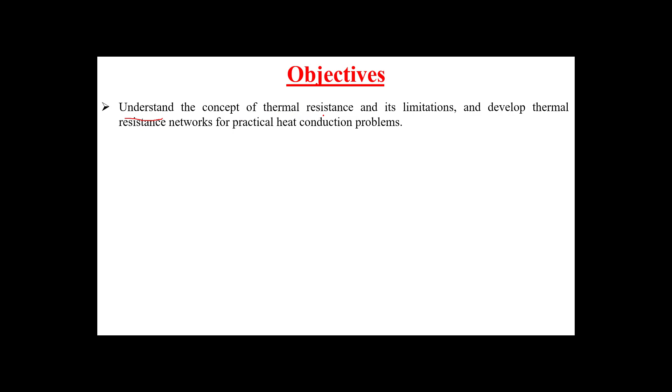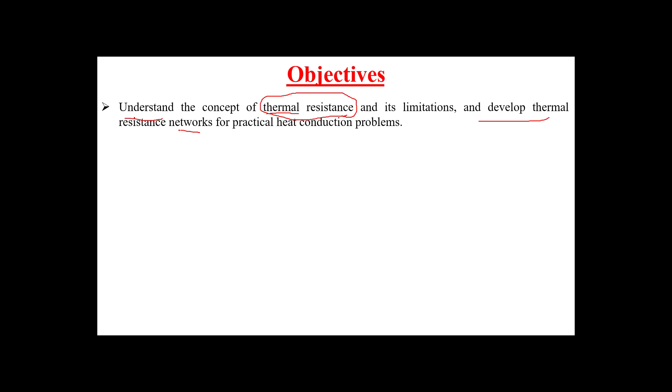Thermal resistance, I think you are very familiar with this word, resistance. We have electrical resistance, now we'll have thermal resistance. In the coming slides, we'll identify the meaning of thermal resistance and its limitations, and develop thermal resistance networks. I think you are also familiar with resistance networks, especially if I mention that these networks may be parallel resistance or series resistance or a combination of both. So yes, I think you are familiar with this.

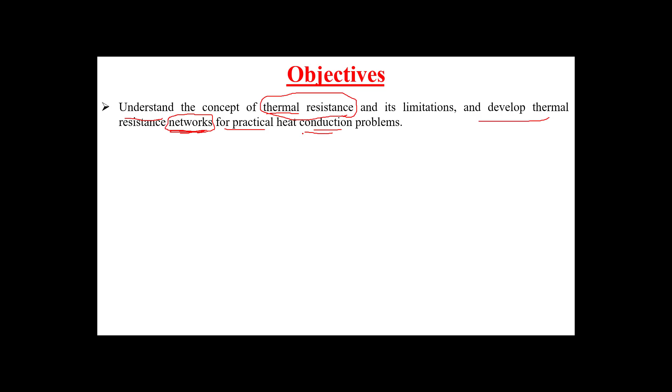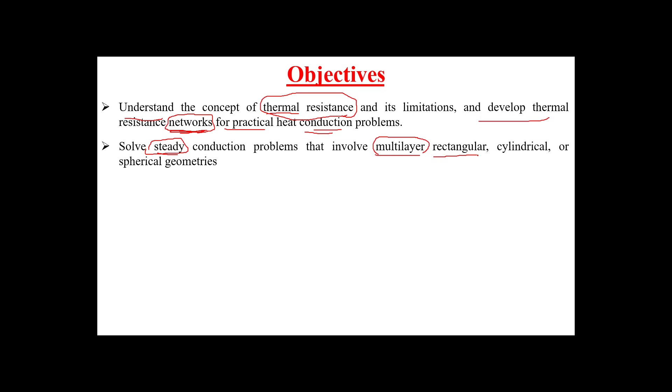But now we'll talk about thermal resistance networks for practical heat conduction problems. So we'll talk about conduction as well as convection and radiation. Solve steady conduction problems that involve multi-layer composites. It's not simple: composite, multi-layer, more than one material, for three coordinate systems: rectangular, cylindrical, and spherical geometry.

Develop an intuitive understanding of thermal contact resistance. This is the first time we are talking about this terminology, thermal contact resistance, and the circumstances under which it may be significant. We'll see when we can consider it or when we ignore it.

Identify applications in which insulation may actually increase heat transfer. So what's the purpose of using insulation? Insulation is important to minimize heat transfer; its essential use is to minimize heat transfer. So there are certain applications in which insulation may actually increase, not decrease, heat transfer. We'll see when using insulation in a bad way will result in increasing heat transfer.

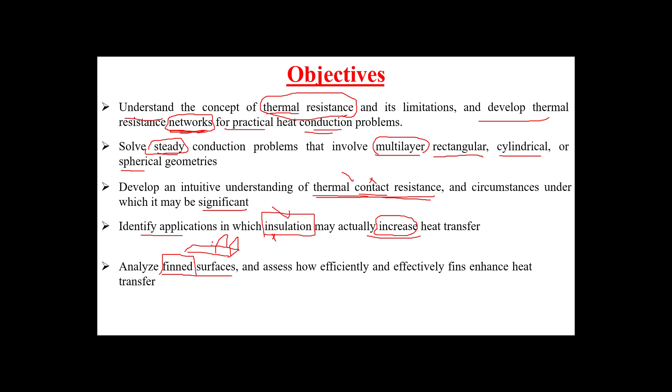Analyze finned surfaces. The meaning of finned surfaces: if we have a surface like this, with extended sheets like this, we may have welded them, or we may have fixed them with bolts, an extended surface. This is one type of fin. We call it a finned surface.

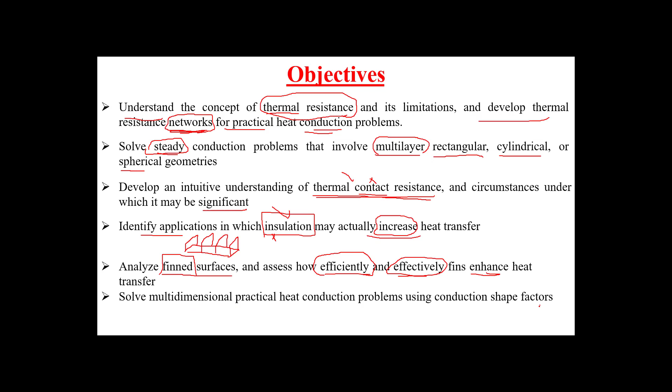And assess how efficiently and effectively fins enhance heat transfer. The purpose of adding an extended surface is to increase heat transfer, because we are increasing the surface area. So we'll learn how to calculate the efficiency and the effectiveness of fins. Solve multidimensional practical heat conduction problems using conduction shape factors. If time allows, we'll cover this objective.

Now let's start with the thermal resistance concept, starting with conduction thermal resistance. Fourier's law for conduction in the wall: K multiplied by A multiplied by T1 minus T2 over L. Remember, this is Fourier's law. We can write the conduction equation in this format if we assume what? Let me go to the writing board. Q conduction equals minus K A dT over dx.

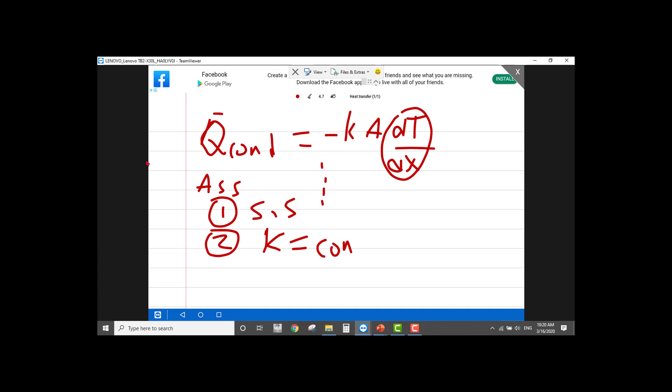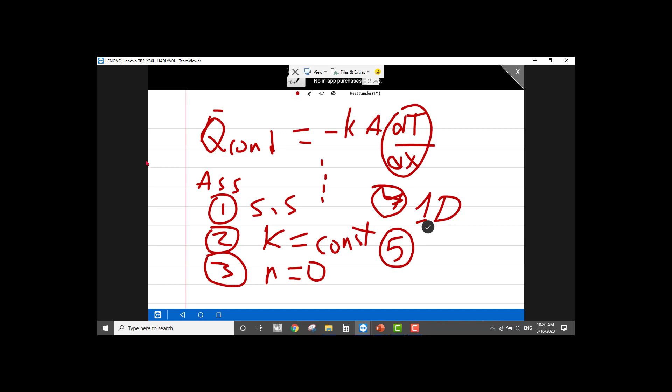We mentioned in the previous chapter that we need to go a further step to find delta T over delta x. But remember when we assume: one, steady state; two, k constant; what else? n equal to 0, this is a wall; what is the other assumption? 1D problem; and the boundary condition is specified temperature.

Q conduction equal to minus K A T2 minus T1 over L, and this bracket gives a minus sign, so minus with minus becomes positive. Okay, so here is the new equation. So Q conduction equal K cross-sectional area over L, T1 minus T2. Now this term we'll give a new name.

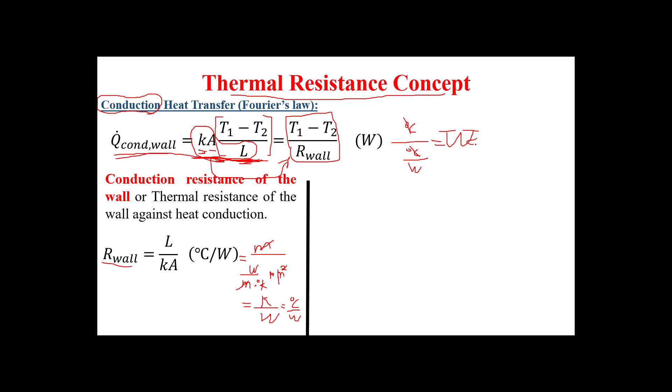So squared with meter cancel out, meter with meter cancel out, and we end up with Kelvin, or Celsius, over watt. Now if we substitute the unit for R wall, degree Celsius over watt, and here we have degree Celsius, then Celsius with Celsius cancel out, and we end up with watt as a unit, which is the unit of Q dot conduction. Let me erase everything.

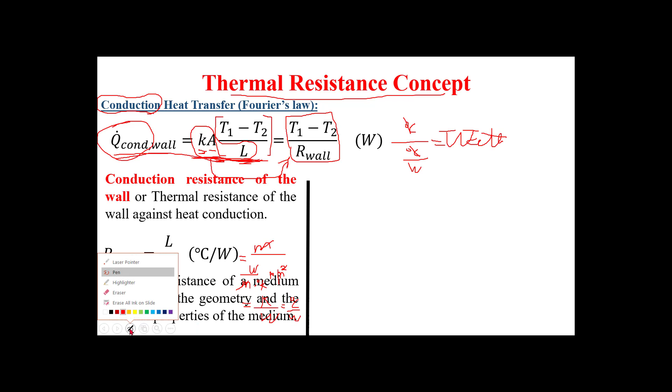So the thermal resistance of the medium depends on the geometry, you can see here, and the thermal property of the medium, K. Now, what is the physical meaning? Why do we call it resistance? If the resistance of the wall is very high, what will happen to Q? It will not pass. There is no heat conducted through the medium because we have high resistance.

Then when will R be very high? Look here. If K is very low, then R will be very high, like insulation; conductivity for insulation is very low, it doesn't conduct heat. K is a property, so K will be very low. Now if K is very high, conductive material, then R will be very low. There is no resistance because this material is conductive.

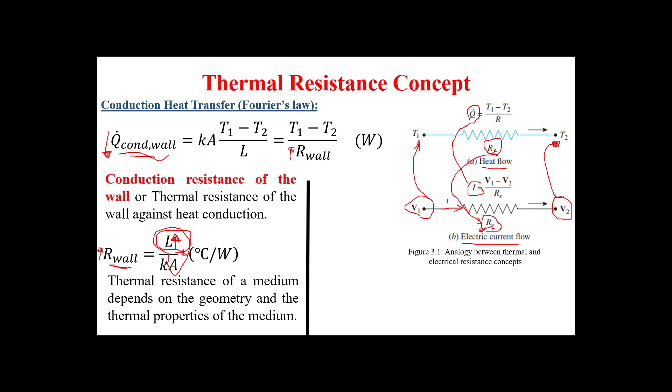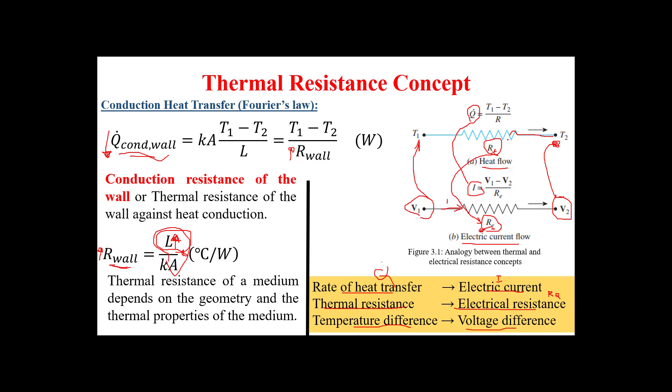And here we have electrical current I passing over the resistance, and here we have Q. So heat transfer Q dot corresponds to electrical current I, thermal resistance to electrical resistance, and temperature difference delta T to voltage difference. This is the analogy. And see, we use the same symbols, resistance, same everything.

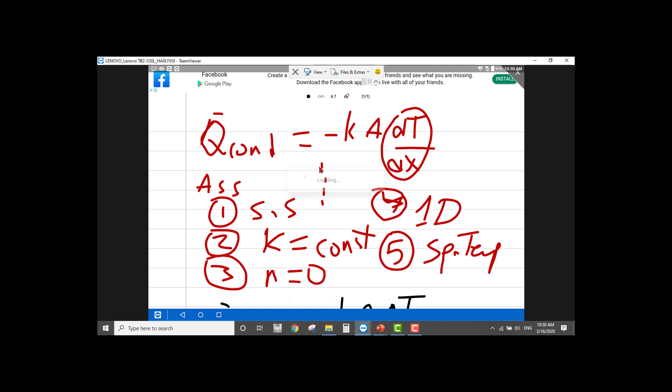Now let's talk about convection heat transfer, which is Newton's law. Let me go to the writing board and we'll do the same. So Q dot convection equal to H convection multiplied by surface area multiplied by Ts minus T infinity.

Now, in order to write it like the conduction equation, delta T over thermal resistance, I'll keep Ts minus T infinity, and write here R convection, where R convection equal to 1 over H times surface area.

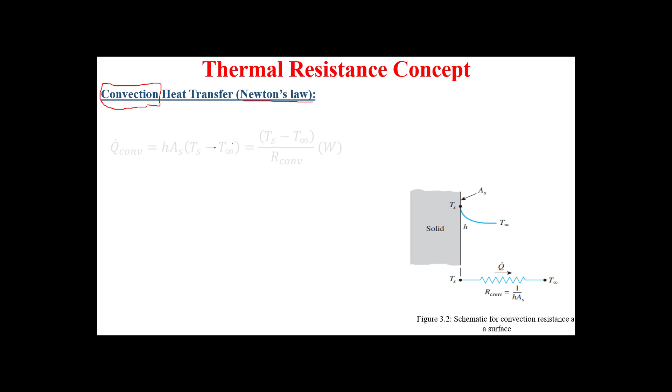Yeah, here is the equation. Q convection equals h As (Ts minus T infinity). Or we can write it in the same format: Ts minus T infinity divided by R convection, where R convection equals 1 over h As.

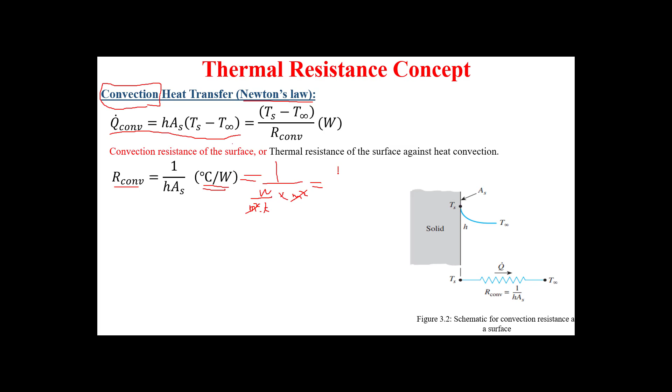Keep in mind that the unit for the resistance, whether we are talking about conduction, convection or radiation, will be the same: degree Celsius over watt. Why? Let us check. 1 over, the unit for h is watt per meter squared Kelvin or Celsius, multiplied by meter squared. So meter squared cancels out, and we end up with Kelvin or Celsius over watt. Okay.

Now, the physical meaning. When the convection heat transfer coefficient is very large, approaching infinity, the convection resistance becomes 0, and Ts equals T infinity. That is, the surface offers no resistance to convection. Why no resistance? Because R equals 0. Where is it? Yeah, here. Okay. But let me go back a little bit.

When will h be very high? We said earlier there are two or three types of convection: natural, forced, sorry for the bad writing, and phase change. Phase change is boiling or condensation. Okay. Now the other question: which one has the highest h? Phase change, then forced, then natural convection.

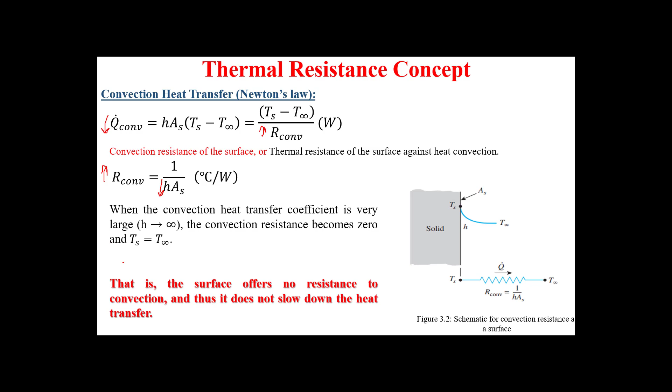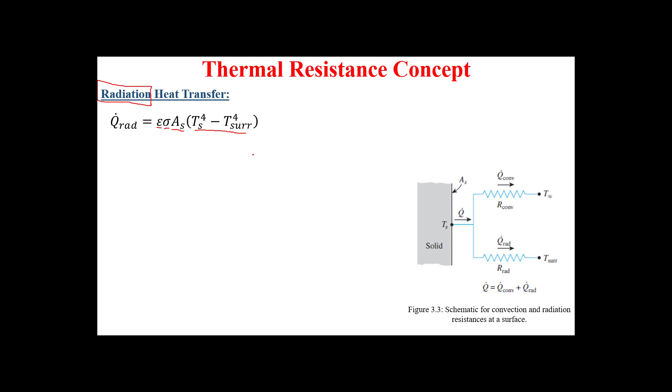Now, radiation. Q dot radiation equals epsilon multiplied by sigma multiplied by surface area multiplied by Ts to the power 4 minus T surrounding to the power 4. Remember, we write this equation in two formats. Let me go back to the writing board. We need to write the three types of heat transfer in the same manner. So this is Q radiation. The other format is h radiation As (Ts minus T surrounding).

Now, on one side of the wall, sometimes we'll encounter both Q convection and Q radiation. So we have two resistances, and they will be in parallel, as you can see. Q flow has a resistance from convection and another from radiation. So Q, whose analogy is the current I, will separate, one from there and one from here. So the total equals the summation. Remember in chapter 2 when we talked about combination, Q total equals Q convection plus Q radiation. So we have two resistances in parallel.

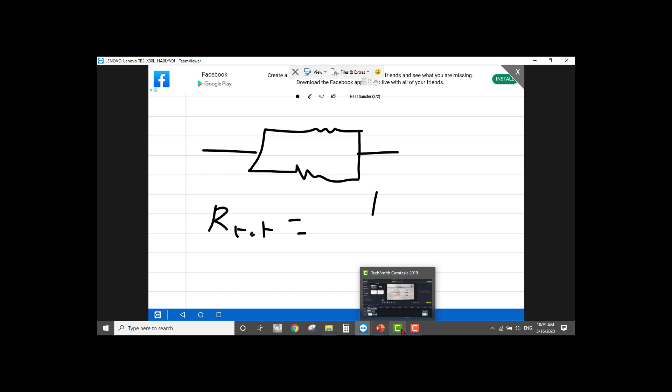If we have two resistances in parallel, then R total will equal, let me write it here. I believe you know very well how to write it. If this is R1 and this is R2, 1 over R total equals 1 over R1 plus 1 over R2, or you can write it directly as the product over the sum, but I need you every time to write it in the general form, because sometimes we have three resistances in parallel.

When we do the combination, we assume that T surrounding is almost equal to T infinity, then we have h combined, which is the summation of h convection plus h radiation. We did this earlier.